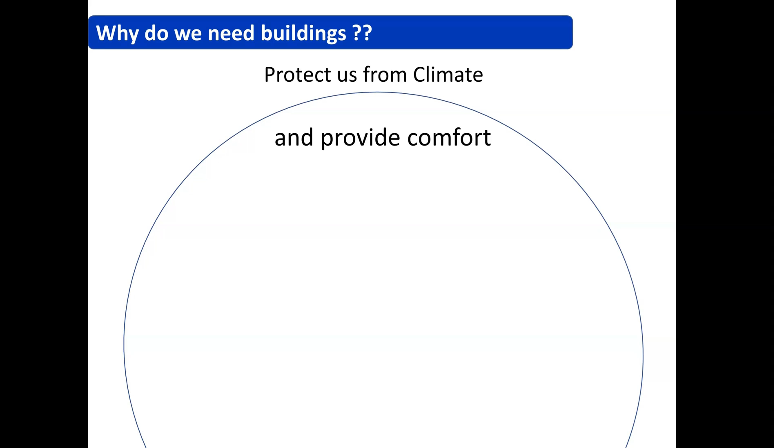Now when I say comfort, what is the basic comfort your building should give you? Should have four walls and protect us from the weather and climate outside. Thermal comfort, yes. So first and foremost, this is us, and this is our building, so this building is protecting our body, basically. So first is the thermal comfort—cold, hot, rain, everything, it should be comfortable in. Second is visual comfort—light, dark, light, anything.

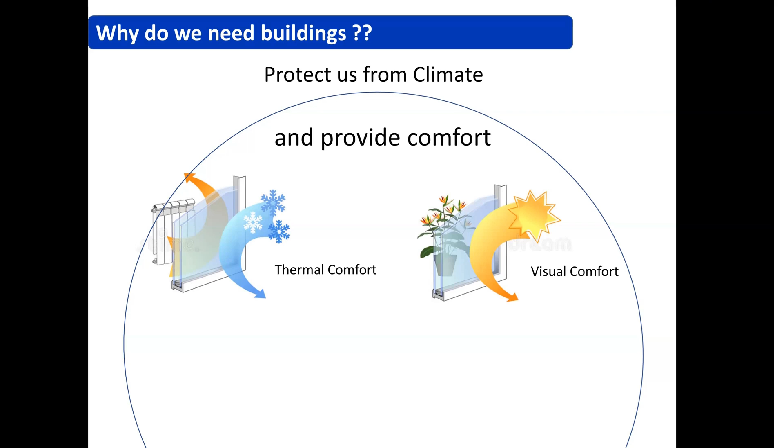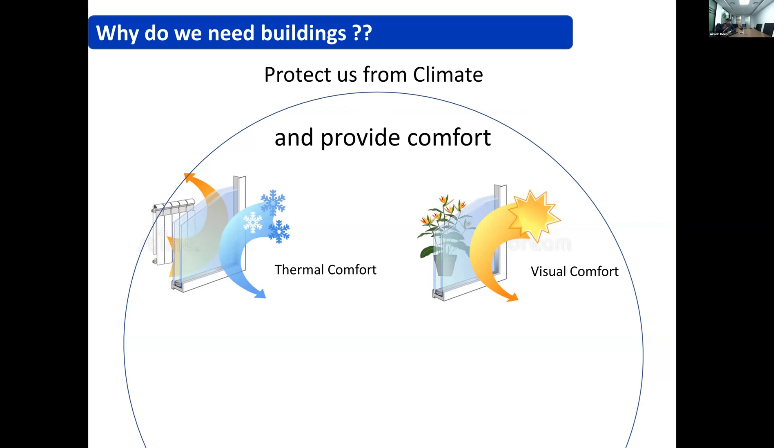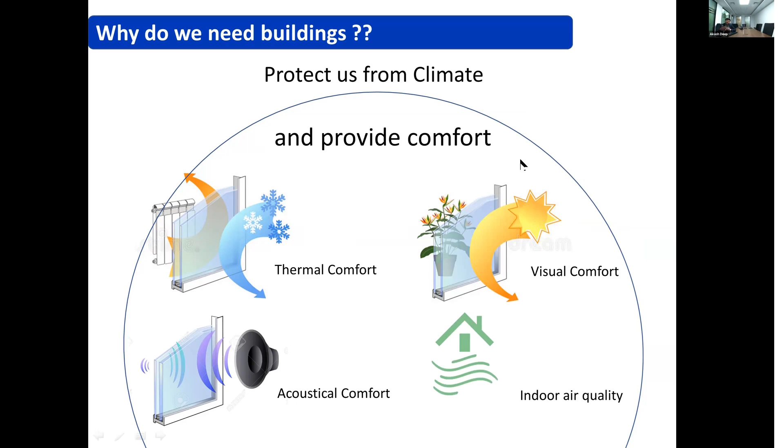Anything else your body needs to work or stay comfortable, other than the basic needs? Yeah, air. Yeah, so acoustical is the third one, and in modern day times the issue is air quality. So these are the four major comfort levels which your building should provide in general, right? Now if your building is not doing this, there's something wrong with it. Let alone sustainability, let alone building design—if your building is not meeting these basic requirements, it's not fit to be called a building, as we say, and it's definitely not sustainable. If you do this sustainably, that's where you work in tandem with nature and save cost.

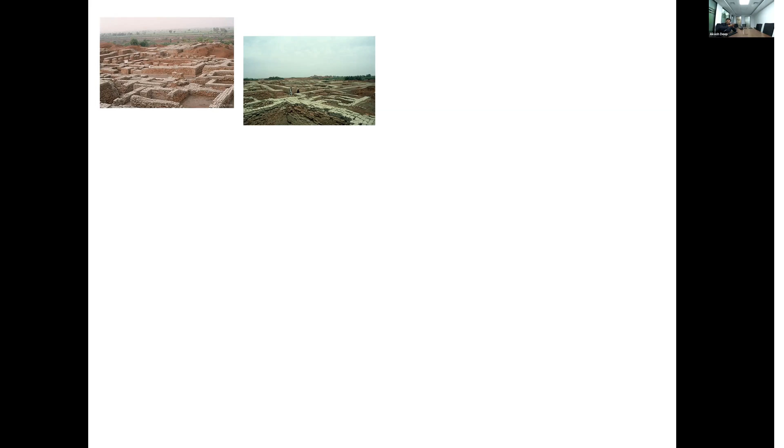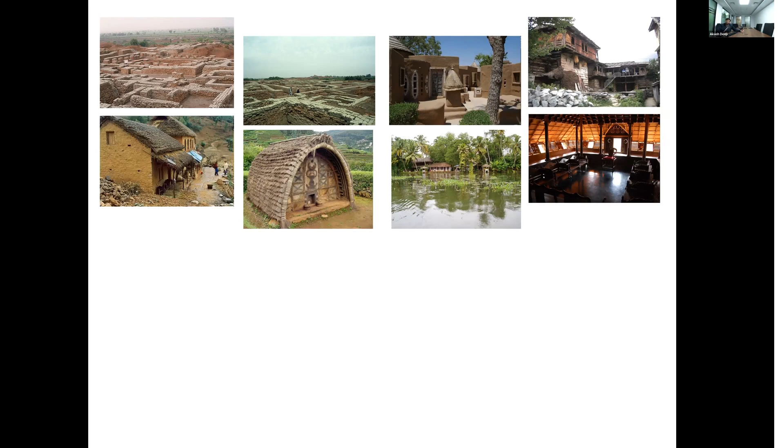Our old houses, all our villages - and villages are still sustainable. What are we trying to make them sustainable for? They were sustainable, they are sustainable. The problem is that they are trying to ape the cities now, which we have as urban centers, which are again unsustainable. Everything was sustainable - where did it go all wrong? But now we are developing, and that's where this challenge of sustainability has come in. How?

You want to see? So, dress code - we have uniform clothes for everyone. We are developing now. Each one has their own basically traveling equipment, but everybody is in the same cars. Everybody looks the same. So we have uniform transport, uniform cars.

Even the language has become the same. English has become the global language, and the commercial angle has become the automatic speaking language for everyone. Wherever you go, doesn't matter, uniform language. The food has also become uniform - everybody wants to eat pizza, everybody wants to eat burgers, everybody wants to eat Chinese food.

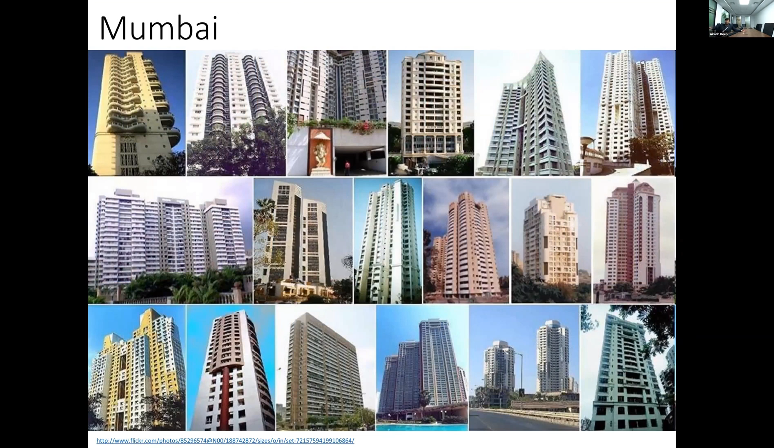Uniform diets. And at the end of the day, buildings become uniform. Take Delhi NCR, Mumbai - no difference at all. Delhi is a hot and dry climate, you have Mumbai as a coastal region, but the buildings are exactly the same. Take Calcutta too.

Just keep browsing Bangalore, every city, and even tier 3 cities are following the same trend. Tier 2 and tier 3 cities are following the same trends. They want a modern, so-called modern building, so-called modern architecture, aping the West.

Everything, all across, you can take one project and put it in Delhi, Calcutta, Mumbai, Chennai, Gujarat, everywhere. It looks exactly the same. It works exactly the same as per the current architecture, and that's where the problem remains.

Let alone buildings, our cities have become uniform. We do training with students, and we used to play spot the tree.

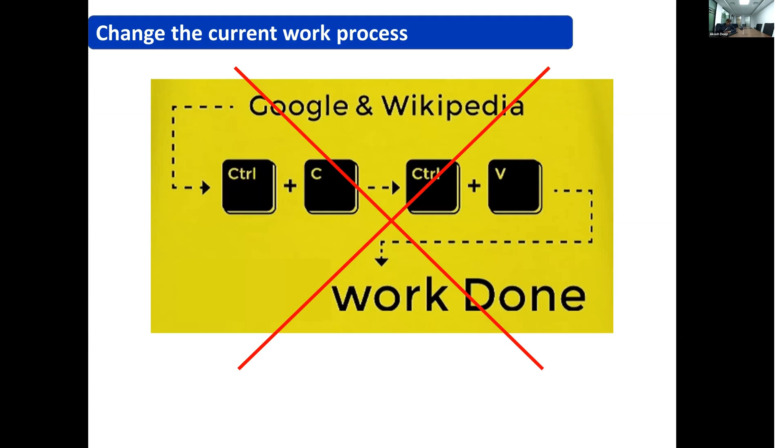Sustainability cannot be done on Control C and Control V. The two favorite keys on your laptops are keyboard and mouse, basically.

Students and nowadays the education system have also gone the same way. Any problem is given, Google it, Wikipedia, search the problem, there's a solution, Control C, Control V, work done. This is neither cool, nor is it sustainable.

If you want to become sustainable, it has to be local, it has to be Indianized. Each city has its own culture, each city has its own language.

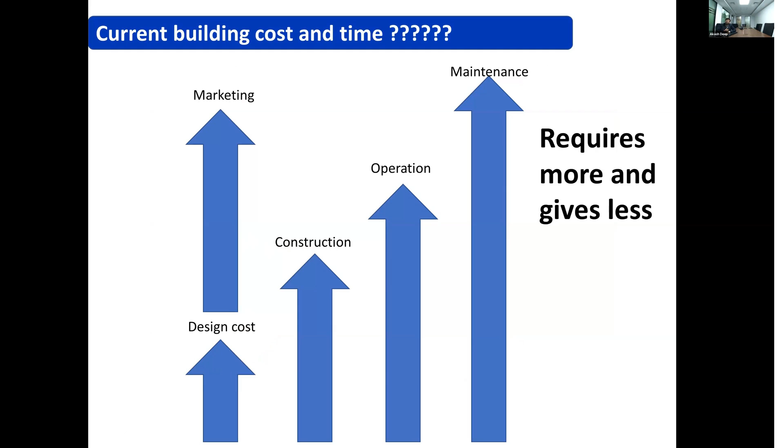So current buildings require more and give you less. What is wrong? Just one single step. I was told that many of us are architects and building engineers, so this slide becomes very interesting. This is where the challenge is.

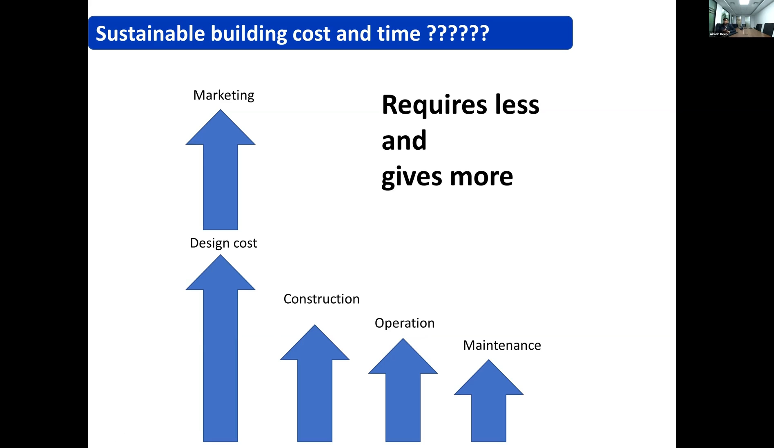So where does GRIHA come in? GRIHA as a rating body evaluates the greenness of a project throughout the whole process of its life.

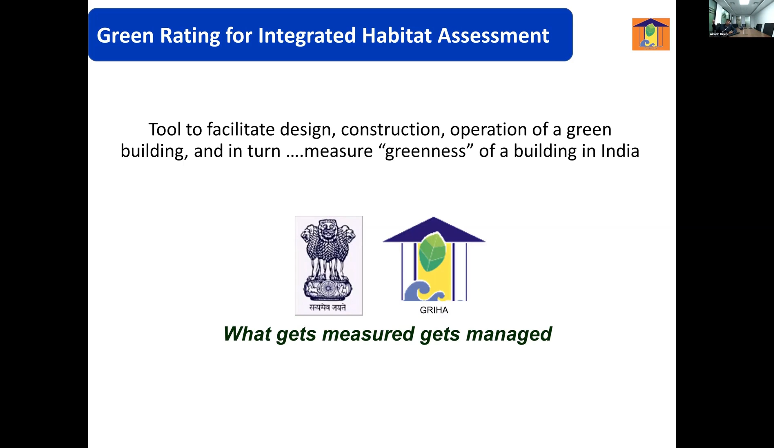GRIHA is not something arbitrary. This is a basic management principle. If you want to manage anything, time, human resource, anything, it has to be measured. As simple as that. If you cannot measure it, you cannot manage it. Without measurement, nobody knows what is too little and what is too much. So what GRIHA says is...

There are lots of ways of doing things. Yes, there are lots of bylaws in our country. Yes, the problem is nobody knows all these things, how to do everything. Everybody cannot be aware of everything. That's the problem. So what GRIHA does is bring everything together in one platform.

Do GRIHA, and automatically you are compliant with all the regulatory bodies. You are automatically compliant with basic requirements of all systems, whether it's planning, water, energy, or social, anything it can be basically. So it's the right effort we are looking into, not the extra effort. Doing more work is not necessarily good, but doing the right work is important.

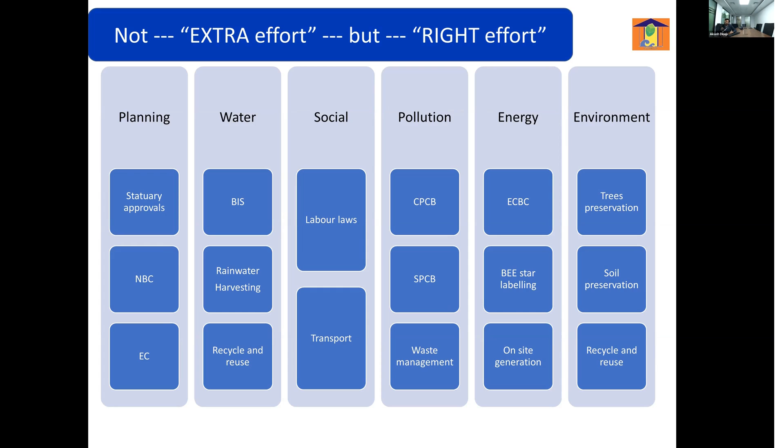Your choices are very important, and that's what makes your building sustainable. So in general, in a project you have four stages: design, construction, operation, maintenance. GRIHA evaluates the whole process. Why does this become important? I know the GRIHA process is long. Obviously, the life of a building is long, and that's why sustainability becomes important. Why is this important? Okay, as an architect, I have done my duty well.

I have made a very sustainable design. It's a building which does not depend majorly on air conditioning systems. It's a well-ventilated building which we have. But during construction, there are lots of wastages happening. The construction management was totally mismanaged.

At the end of the day, project cost increased because there was lots of mismanagement on the construction site. Material got wasted, things got mismanaged. So the project is not sustainable.

Design happened very well. Construction was also very well taken care of. But at the end of the day, when it went for operation and maintenance, I was not aware of how to maintain the building. So I'll get huge bills, huge water bills, and I'll generate lots of waste. So the intent, the design transfer to the user doesn't happen, and that's why that also becomes unsustainable.

Now feel as an architect, if the base itself is missing - I just picked up a glass box and put it there - I have a glass box which I've put in, which in a hot and dry climate logically will never work. Whatever efforts the construction team or the operation team might make, they will not be able to make it sustainable. It is literally not possible.

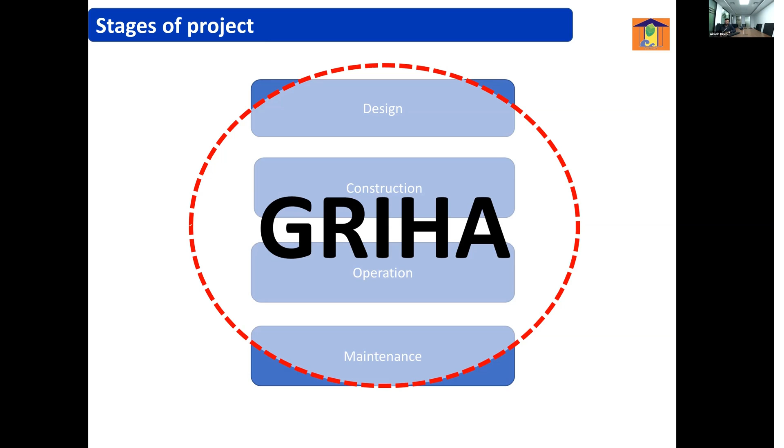So that's why I said the process becomes very important. The way you proceed to the end result is what matters, not the end result itself. Automatically the end result will be sustainable. And that's why we have evaluated the life process of a building.

We make multiple buildings - residential, commercial, office, bank, dhaba, everything. Now when you talk about sustainability in a built environment, my strategy is to adapt to these scales of buildings, or typologies of buildings, again as per the size of it, not the type of it. Type of it, back-end calculations exist and will keep happening.

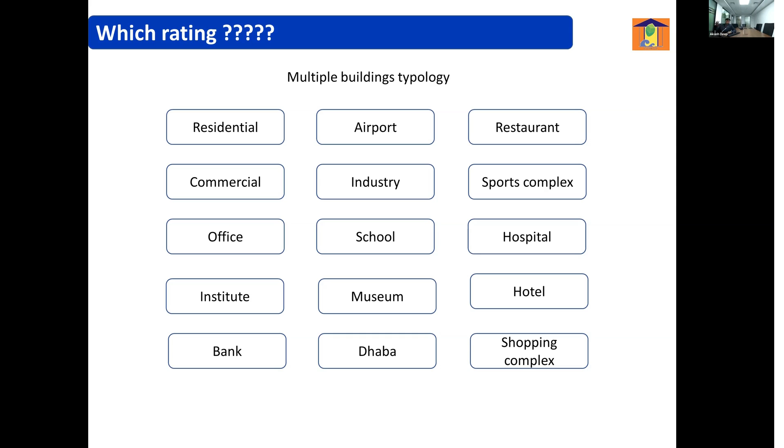But when I have a small scale site, I have other strategies to play around with. When I have a medium scale project, I have strategies to play with in design, landscaping and everything. And when I have a large campus, I have totally different strategies. So what Griha has done is basically, okay, you make n number of buildings, but I can't make n number of ratings for you in the end.

So what we have done is, buildings can be of 2 types, new or existing. Now when you talk about new, there are 3 scales it's divided into, and one has a special case under the Pradhan Mantri Awas Yojana. One is SVAGRIHA, which is a small scale rating - simple, versatile, affordable Griha. Now the intent of this first rating itself is that for a small scale project - your house, my house, any small office which is less than 2500 square meters - you do not need a consultant.

You yourself go put your details in the tool. It will suggest what you should do as per your climate zone to make your building much more sustainable. So it's a design-cum-rating tool that evaluates - that's Griha itself.

Now Griha, being the major scale, is for everything above 2500 square meters of built up area. Then we have Griha for Large Development - this is for anything above 50 hectares of site area. Now this rating evaluates your impact. Now these big sites come up over 15, 20 years down the line.

Is your planning taken care of so that after 50 years, after 20 years, your whole campus will be sustainable? That is what it evaluates.

Now interestingly, you'll be amazed to know - I'll share the link at the end for you all to go watch that video, it's on YouTube - we have the first dhaba to get rated under SVAGRIHA. A basic dhaba can also be evaluated. If anybody is staying towards the Moradabad highway, there's a place called Tadka Dhaba, a very interesting place to go eat food. So the basic environment you live in, you sit there, the food production, everything is sustainable. There are many projects which have shown that sustainability is actually equal to affordable, basically.

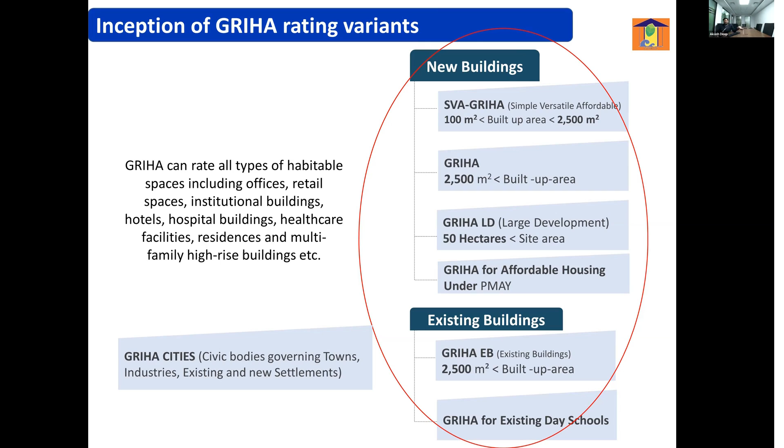And then you have Griha Cities, which is an overarching policy and implementation evaluation tool. Griha has multiple recognitions, so I won't go into the recent ones and the oldest ones. As Shweta was saying, Griha was made mandatory in 2009 for all central government buildings to get a minimum 3-star Griha rating.

Other than that, some states have also adopted it as a mandate for taking Griha rating. But mandate in a country, we all know what that means. Mandate is a mandate, but how many mandates do we actually follow? We are also aware, whether it's traffic rules or any other rules.

So it takes time in our country, being a democratic one - it's easier to put something in policy. One of the challenges our country faces, given the population issue, is that implementing the policy is the hardest thing to crack, basically. And that's what we are trying to work out.

Nothing more about Griha - now taking you to the state case studies. Very interesting ones, and the first 3 are from the residential segment itself, in which I'll try to show what important roles the 3 stakeholders have.

The first one is from Rajkot - it's a Smart Ghar, done by Rajkot Municipal Corporation. In this, we see the role of the architect and how important that role becomes when design becomes very important, and how design can change everything.

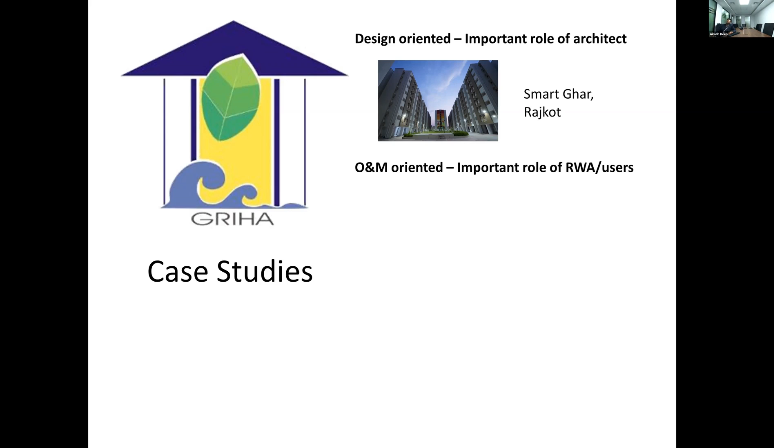The second one is about how important users are - as a developer, as an RWA, as a user, what all we can do when we are living in our society. Everything is not the developer's responsibility, everything is not the government's responsibility - how the RWA becomes very important.

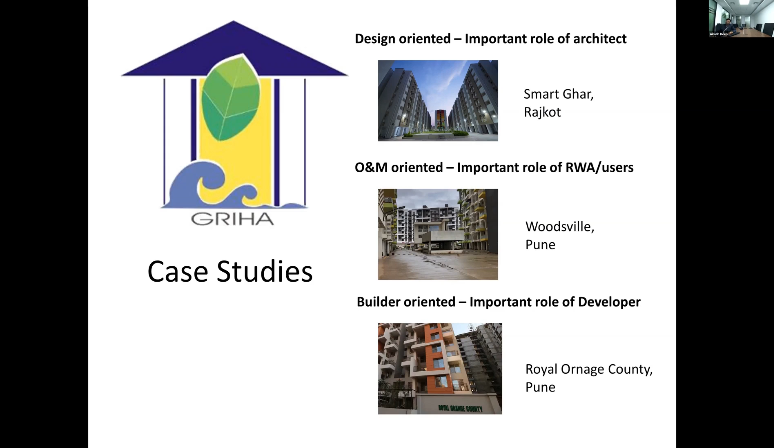This comes from Pune, Woodsville area. And the last one also comes from the Pune region, showing how a developer, which majorly looks for commercial value in everything it does, approaches this. So the last case study gives you an idea of how sustainability has commercial value at the end of the day.

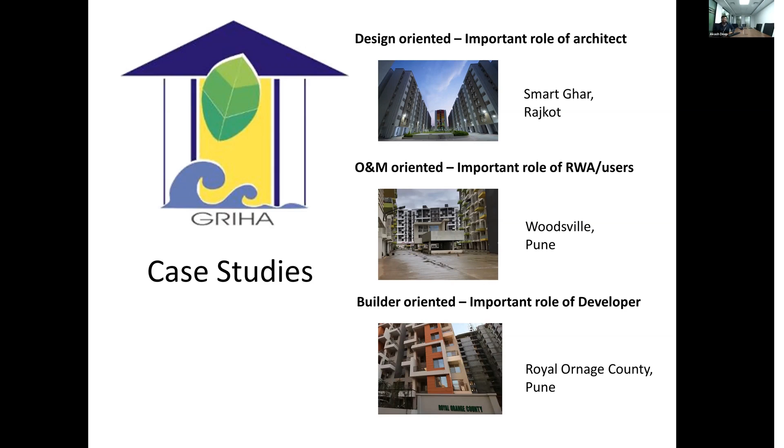These are all 3 residential cases, especially picked because people think that sustainability isn't achieved as much in residential projects, and that's why I picked these 3 case studies for today. Starting with the Rajkot one - a very interesting project.

So when we talk about cross ventilation, natural ventilation should be there for all bedrooms, all flats which we now build and stay in. And interestingly, when we talk about cross ventilation facility or facade which has been given to us, all bedrooms across the country have one window, one door, and that's the end of cross ventilation in the modern flat design which we have.

Correct me if I'm wrong, anyone. The modern day design of flats is, you have a window which is outside, which gives a very good view, and then you have a door at the end of the day. That's the amount of cross ventilation design, the choice which we have given a user, that you have one window and one door. Now nowadays most buildings go above 5 or 6 stories.

So interestingly, if you are staying above the 6th floor in any city, the moment you start opening these windows, you will feel everything coming onto your face, the whole wind pressure coming onto the face. Even if the outside climate is very good and it's just rained, very ambient weather outside, I can't open the window because of the wind pressure, because the design only enables me to close the window and use the room for daylighting.

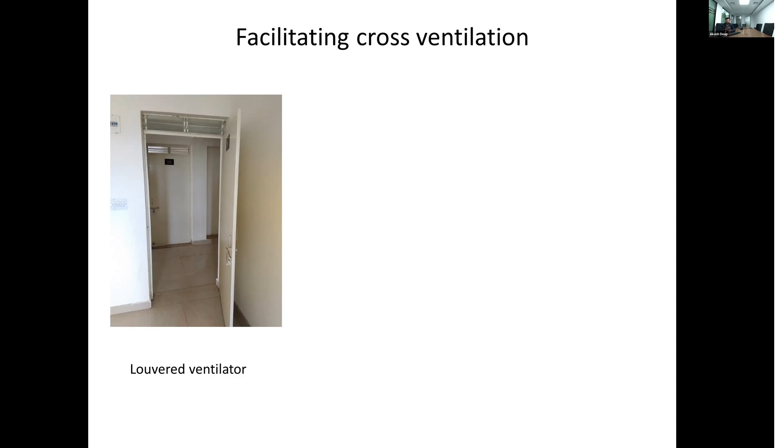Now what happens is in this, it was a louvered ventilation, but because of mosquitoes and issues with insects coming into the place, this design got altered in the next design. Basically what they did was they started using a sliding ventilator on top. The ventilator has basically disappeared from our apartment designs, but yes, they have tried to use it again in their affordable housing design.

But with this there was another problem, having to operate it again and again, and that's the same thing which happens in our bedrooms. Nowadays everybody has a slider window, the whole door frame. Door and window is common nowadays in most flats designed in modern times. So even if you open it a little bit, the wind speed is huge, and the rain comes in and water comes in, everything comes in from this opening.

So then what they did is they went ahead and did a very interesting design. Instead of having a slider window or slider ventilator, they went for a top hung ventilator. Now what it does is it gives you multiple benefits.

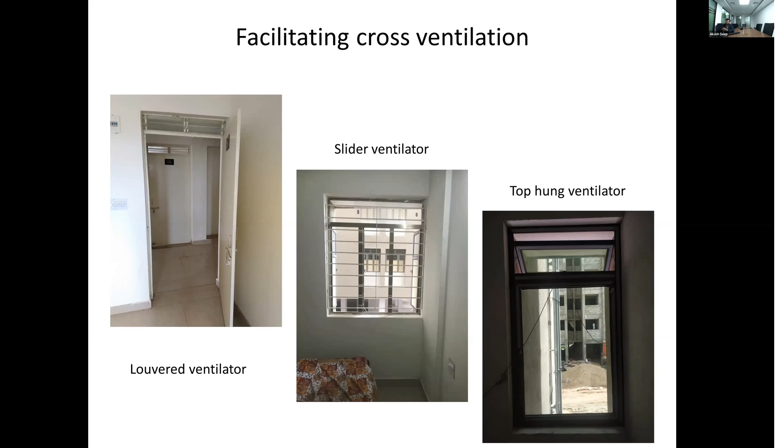Very simple design change. One, it acts as a sunshade, it acts as a shade for rain coming in, so there will be no water coming in even if it's raining outside. Second, you have the option of modulating the wind speed wherever possible. If through this opening the wind is gushing in at high speed, I have an option to reduce the opening and make sure the wind velocity reduces as much as possible. So you have given that control, that choice to the user - if you want to use your space for natural ventilation, you have that choice. Current design doesn't give that choice to us.

Interestingly, what they did was, if you see the design plan, the ventilators which I was showing you were given in both the doors and the windows in the balcony. And what they have done is this is a one BHK house with a utility, one bath and one WC. This one duct is common between 2 flats, and what they have done is they have done something called forced ventilation on top of this duct.

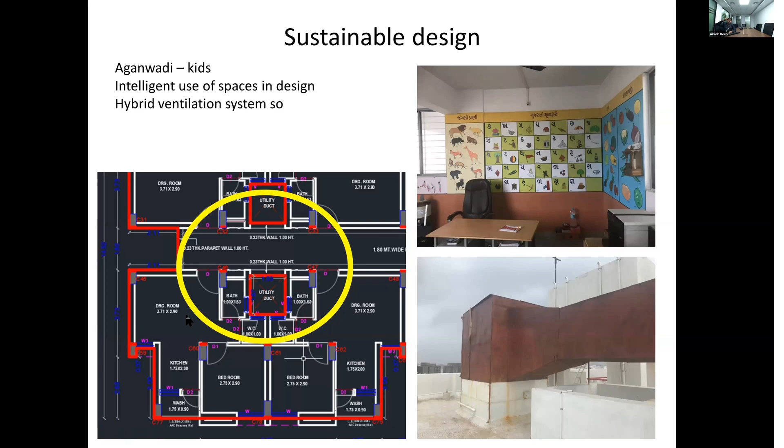So what putting one exhaust fan on top does is reduce each flat owner's cost. By placing an exhaust fan into the WC in the bath area, across all 7 or 10 stories, every user's 2 exhaust fan cost gets reduced.

Now, what it also does is create a negative pressure in the utility duct itself, which creates negative pressure in the bathroom and WC. So there is always a negative pressure from the bathroom towards the utility duct, meaning the smell problem that usually occurs won't happen, because one major issue with affordable housing is that it's not properly cross ventilated, and there are chances of bathroom and WC smell coming into the living and kitchen areas. Since there's always negative pressure in that duct, the smell will not go back into the living space.

Further, it creates negative pressure in the drawing room and kitchen area. So even if you're not there in the room you're using, it tries to create negative suction of wind through the leakages of air in the windows and ventilators, making sure this space automatically gets some cross ventilation through this negative pressure.

Further, they have implemented multiple other interesting design strategies, and these are working very interestingly if you go and visit these sites as a whole.

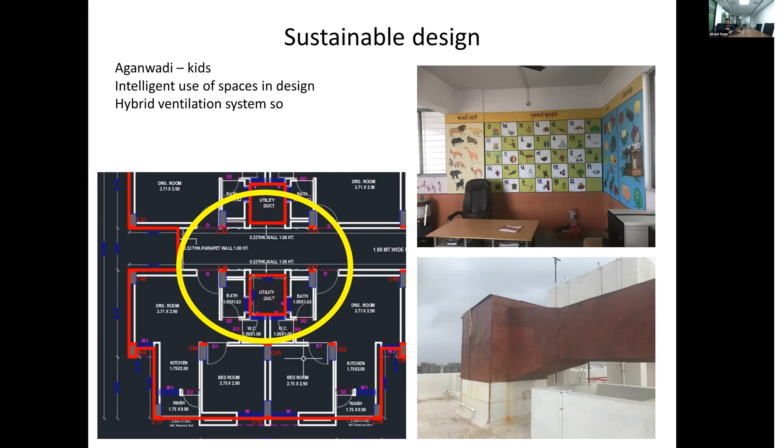And it's very basic, simple multiplication and division, but it is not taught. That's what we try to go and teach to students. Sustainability is very simple, it is not that complicated. We should stop making it complicated. Another example, very good, showing how as a user we can make a difference.

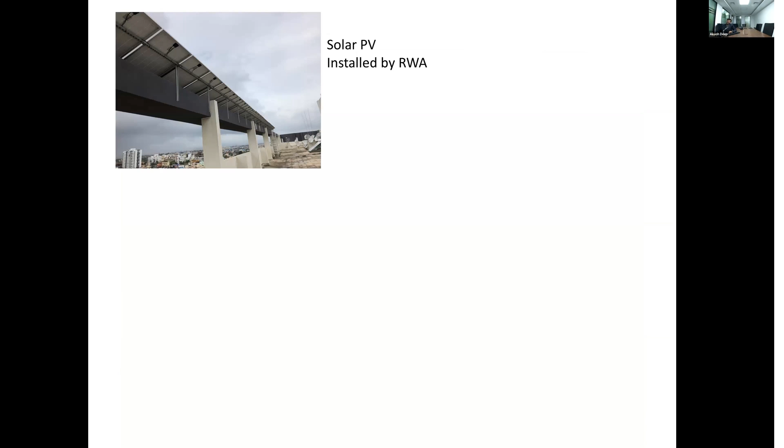These solar PVs were not given by a developer. They themselves saved the maintenance cost and went ahead and installed these solar PVs. The developer gave them hot water on the site basically.

This is one of the most detailed data collection systems I've seen across government buildings, private buildings, commercial buildings - one of the most detailed systems which they keep in place in their society. And they have very interesting ways of highlighting people who don't want to listen. Every month they have an energy bill and water bill list pasted in the central lobby on all floors, highlighting specifically in red and green 2 or 3 people who have either used lots of energy and water, or who have actually saved a good amount of energy and water, to make people start realizing that everything is our responsibility. Nobody else will come and save us until we ourselves act upon it.

This is the first society where I have seen them start collecting rainwater and reusing it within the whole campus as a domestic source.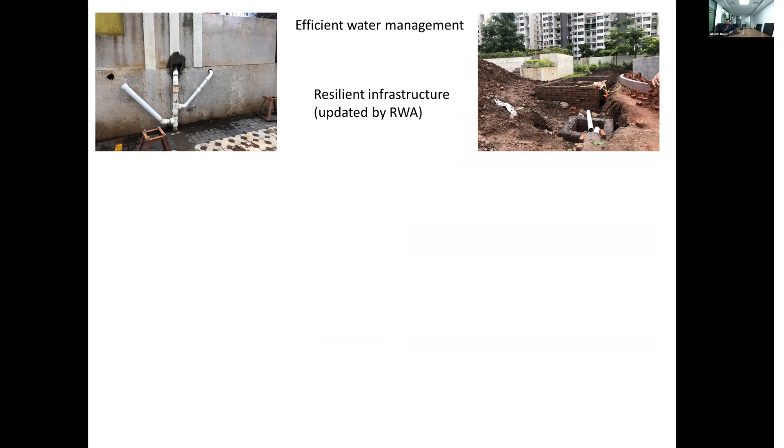I have not seen this in other residential projects across the country.

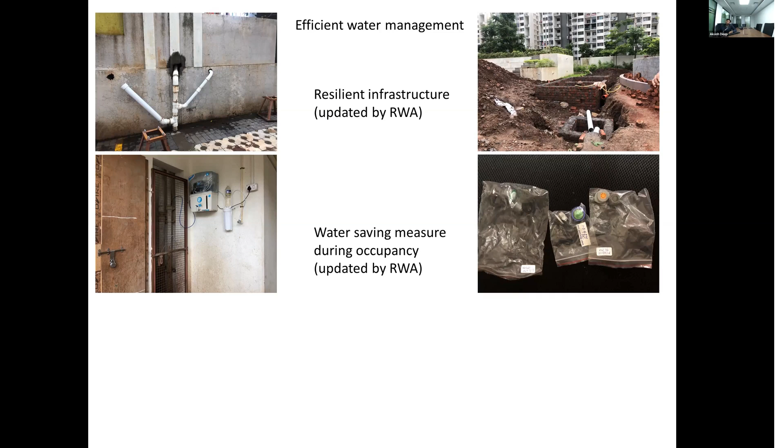Who will use it? This is the first society which we have seen that has gone ahead and installed individual flat-wise water meters. I have not seen any. I doubt you, as architect or environmental engineer, have seen any water meters in place.

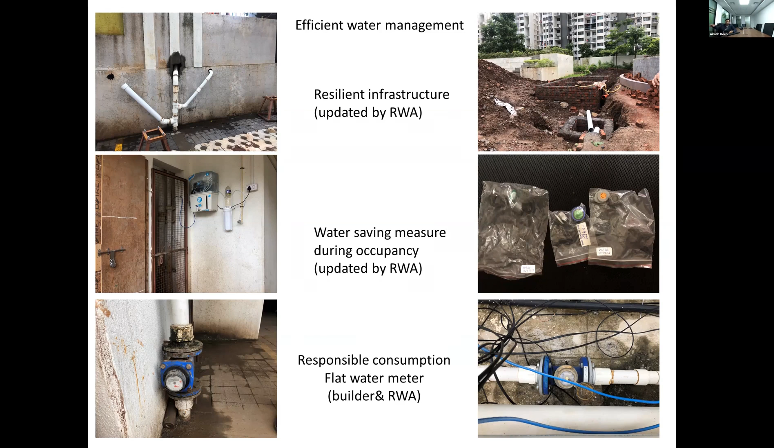And a very interesting example as a developer. This developer is again from Pune, Royal Orange County. If you are in the area or surrounding area visiting, please do go and visit - it's worth visiting as a project.

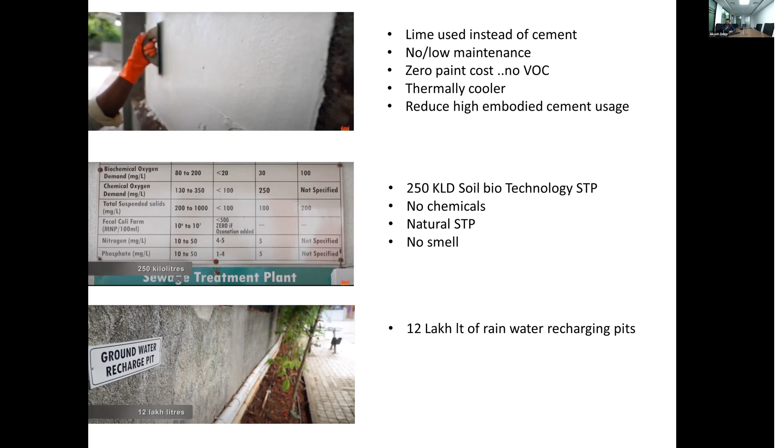One of the most interesting things in the last slide of this project - it's been almost 7 years now, this project is running, and none of the 207 owners have paid an energy bill of more than 100 to 200 rupees per month. Interestingly, what they have done is quite interesting - this unit near the UPS has two lights, green and red, like what you see in your meter often, but their green and red signify something different.

What it does is, they have installed solar panels on the roof and some windmills also, and they have allocated 200 units, at 1 rupee per unit, to each flat. Now they have a red and green light in this - every month 200 units are allocated to you, and if you're using that, staying within that 200 units bracket, your green light stays momentarily on.

The moment you go above 200 units, it switches into a red light, and now you are aware that you are paying 10 rupees per unit, which is the municipality cost, and now I can switch off my ACs if I don't want to. I can control, I can make a choice when I have to close it.

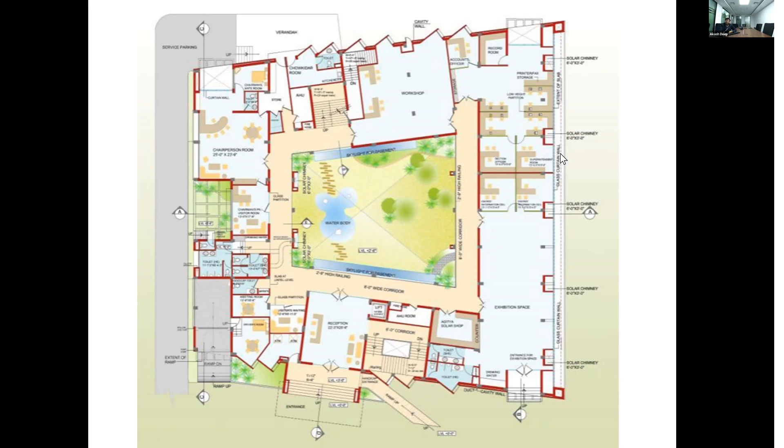The eastern and western facades are majorly services, so that heat gain is reduced. Further, if you see the windows, they open towards the north, so there is very little glare - no glare and only usable daylight. One important thing about daylight is, if there is glare, it will not be used simply as that, and glare will occur if direct sunlight comes onto your window. That's something we tend to forget when making curtain walls.

You might say, how do they use so much water, isn't there a lot of wastage? It's interesting that this is one of the projects we're aware of that is net positive and net zero. Net zero means for energy or water, whichever resource, you are producing as much as you require, and net positive means you are producing more than what you require - you are not dependent on outside resources.

This is one building which is net zero, or sometimes net positive during rainy seasons. During the 3-4 month monsoon, they do not import a single drop of water even for drinking. Everything is collected and used for domestic flushing, irrigation, and even for cooling. The condensation from misting, with glaze tiles and everything, goes back into the cycle. It's a very interesting example.

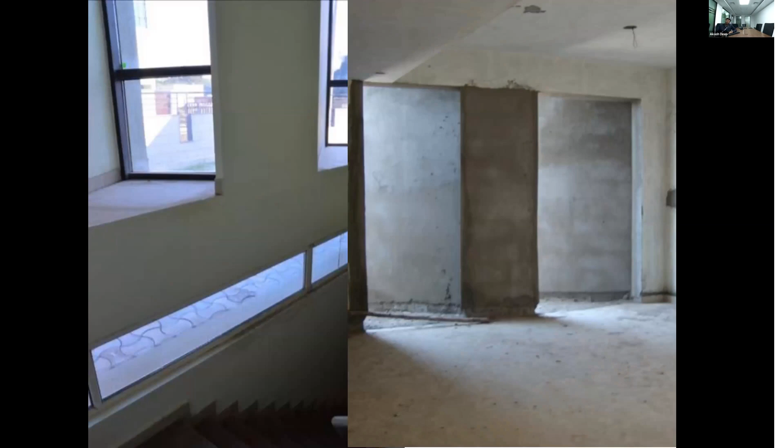So these are the windows which are on the east and west. We often say as architects, we get a site and ask how do I orient it? It's not possible, we say. But we are the ones making it not possible, and we are the ones who can make it possible too, basically.

Last example, Govardhan Eco Village, Mumbai again. Maharashtra has very good examples, and we have seen it. This is an ISKCON campus. Any guesses what is the building material? Mud, stabilized mud earth basically, they have used.

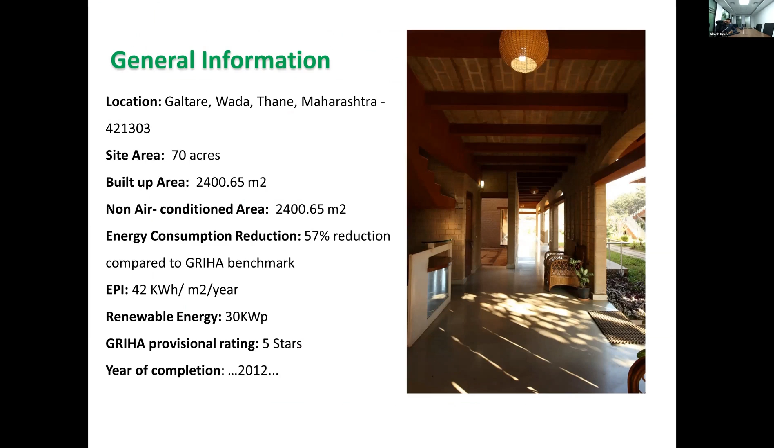One interesting thing about this campus is nothing goes out, nothing comes in, other than we human beings. Everything is from the campus, off the campus, and goes back into the campus. This is in the Thane region, on the valley of the Western Ghats, so it receives lots of early monsoon rains that come with the westerlies. There's no AC across the campus, it's all mud blocks, so we know how thermally comfortable that is.

Interesting thing about the rainwater systems - across India we do rainwater harvesting. It's a mandate thing, but I've not seen many projects actually go ahead and evaluate it.

How much water will go into the soil? There is a specific property of soil we should look into. Can anybody guess which property? There are generally 3 terms which people get confused about. Should I say it? Nobody wants to speak? Not many people are left, and the rest probably want to run away, so I'll finish it off.

There's something called testing soil for porosity, and something called percolation or permeability. Generally soil is tested for porosity because of strength and structural requirements. Across India, very few projects go ahead and test the percolation rate of soil at their site, even though all projects have rainwater harvesting on site. Interestingly, none of us knows how much water will actually percolate, but the rainwater harvesting system is copy-pasted everywhere, and that system is copy-pasted from CPWD. You have the borewell, the filter media, and the holding capacity on top, and that's copy-pasted across the country. Whether it will work or not, how it will work, nobody cares.

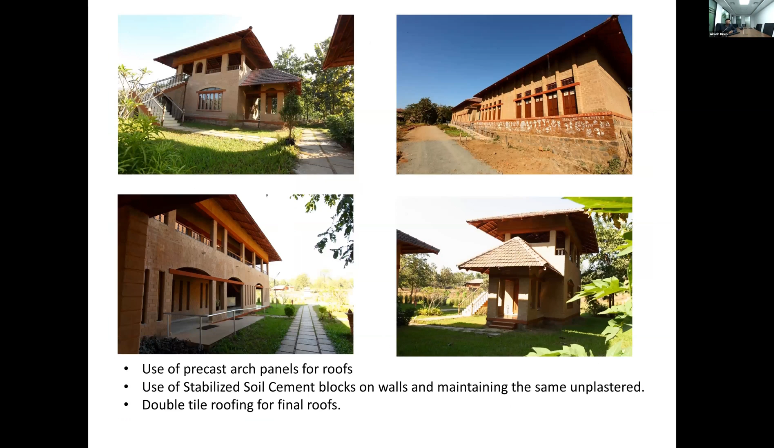So it has a huge network of open drain channels and water bodies which is connected. It has all modern facilities - you can book a room and take your family there if you want to experience sustainable living, what it actually is. Everything is on site: biogas from agriculture waste and food waste they generate, solar energy for all their energy needs, solar hot water, and soil biotechnology used for water treatment.

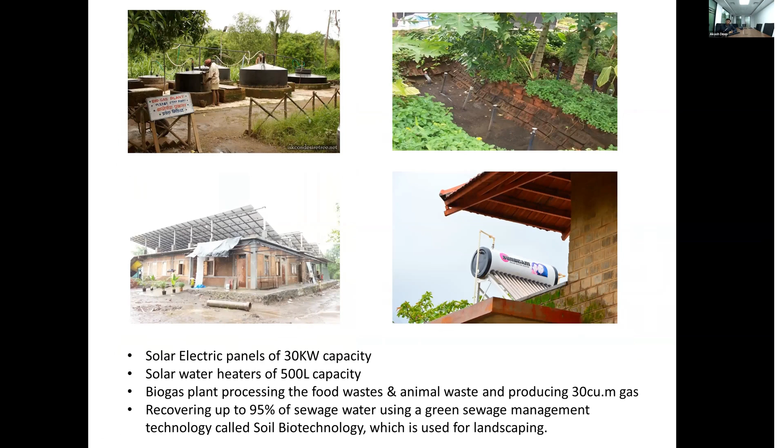With that, many interesting case studies are there. These are just a handful which I can explain in 30 to 45 minutes. Sustainability is such an interesting topic, you can just keep speaking full day, and it is still less.

And some impacts we have created through Griha. Griha has, interestingly, Shweta didn't have these numbers, but these are there on the Griha website also. So Griha now has around 2,200 registered projects across the country, and 700 rated ones.

Now certified has a different meaning. There's something called pre-certified and certified. Griha doesn't have that. Rated means the building is completed and running, while registered means it's still under process. And these are the actual numbers of these 700 projects, how much we have tried to achieve.

Griha is one rating which was also recognized internationally. Through rating, we are trying to implement renewable energy as a mandate in most commercial projects, while in residential it's an optional clause through solar hot water or solar renewable energy. So far we have installed around 533 megawatts of solar across 700 projects, which has saved this much energy and achieved this much CO2 reduction.

And if this can be extrapolated to all 2,200 projects, that is the impact we will be able to create. This is basically in terms of energy itself.

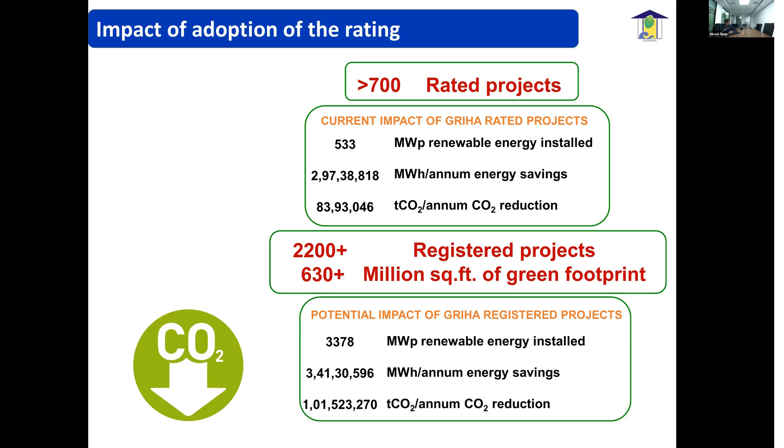And when you go into water and trees, these are the amounts of trees preserved and newly planted, and these we verify through site visits. The Griha Council itself goes on a minimum of 3 site visits per project to see these things are happening on site, so these numbers are checked.

Another thing Shweta was mentioning is that once the building is complete, nobody goes and checks in. Interestingly, Griha is the only rating system where, as per the Indian process, after every 3 or 4 years you have to submit your energy bills and water bills and tell us how sustainably you have kept or maintained your building after these many years also.

On that, I close the presentation. Sorry for stretching it so long and making it a bit longer.

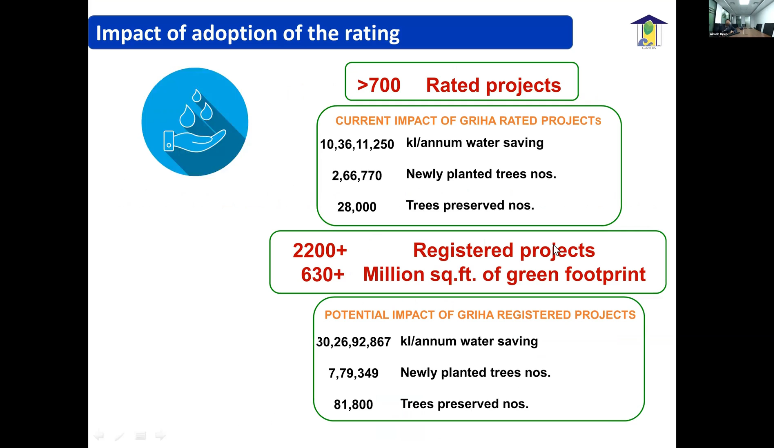If you remember, I have not been able to see the example. Okay, I'll share the presentation with everybody also. Sure, so one of the examples I took you through was in Pune, the Woodsville Society.

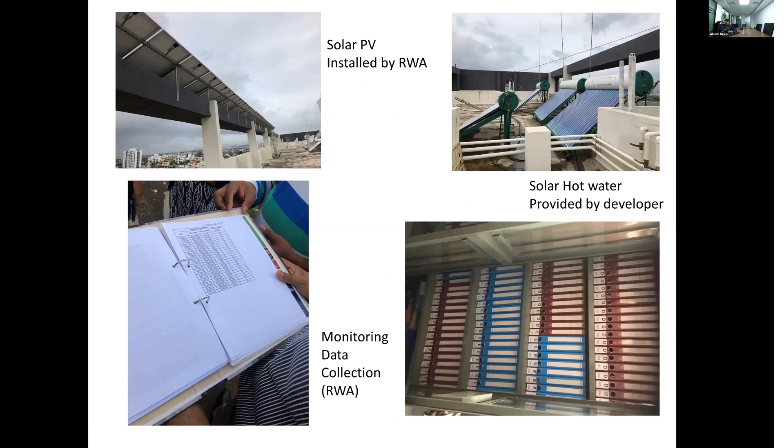This is the one I was referring to, and this is the current practice. This is all RWA, there is no developer, no architect involved. The initial house maintenance for a flat, we also used to pay for a 2 or 3 BHK flat, 5K to 8K, which was there initially when the flat was handed over to them.

Currently, this was last year before the pandemic hit, we were there on a site visit, and they have reduced their maintenance cost to 3K to 5K, with a target of 2030 to reduce it to 1K. That is exactly why sustainability cannot be costly. You have reduced artificial lighting consumption because you have integrated daylighting, which is glare-free with proper shading.

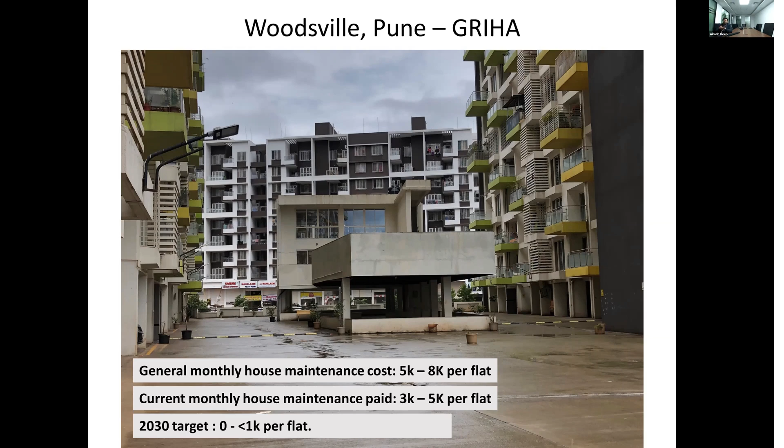Sorry to butt in. The thing is, what I'm talking about is maintenance of solar systems, maintenance of everything. That cost is added in the 2nd or 3rd year, right? Not in the 1st year, because I too worked with Mahindra Life Spaces, which was basically a GRI sustainable company. It worked 3 years ago, and we were working on fly ash bricks, etc.

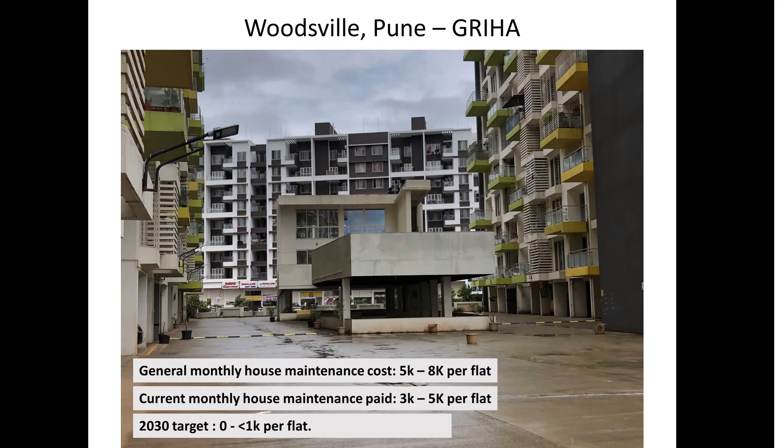But what I understand is your electricity cost, everything comes down. But after the 2nd or 3rd year, the occupant has to pay extra maintenance added into it, right? So I just wanted to clarify that.

So for that, this is a good example for you. Again, this project, Royal County, is near Pimpri area. If you're visiting any Mahindra spaces in that region, do go and visit it. It's 7 years running, and none of the flat owners have paid an energy bill of more than 100 to 200, with the maintenance cost also reduced.